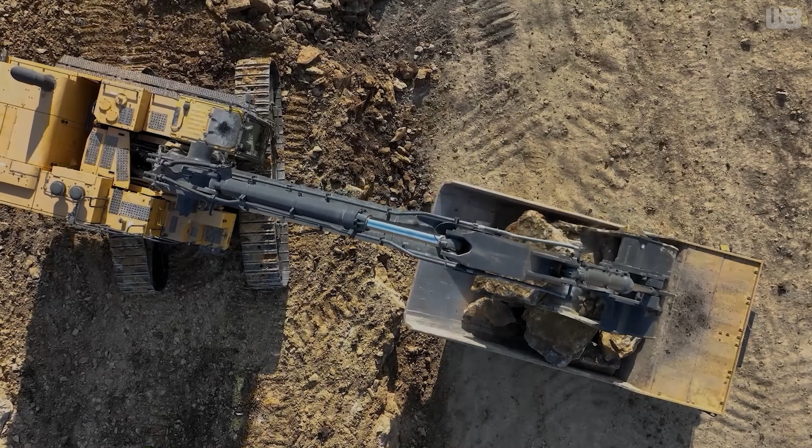I think there's going to be a lot of people out there who may wonder to themselves, why do we even need a form? The challenge, in all honesty, is just the sheer math of the possible configurations out there. From machine makes and models to different classes, stick lengths, coupler options, and the variety of buckets out there, the variations are seemingly endless. So this is why this form is so critical. It's going to ensure that we build an attachment that fits your customer's machine perfectly the first time, every time.

First, we suggest burning an inch. When measuring two surfaces like the inside ear spacing, the tape measure hook can cause some inaccuracies. Start by measuring at 1 inch and then subtract that inch from your final reading. This eliminates hook play and gives you a lot more accurate measurement.

The second thing we suggest is measuring twice. Compare the measurements, and if they don't match, try again. Keep the tape flat and straight. It's super important to avoid any sagging or twisting of the tape. When measuring diameters like pins, we suggest using calipers, especially on those small round surfaces.

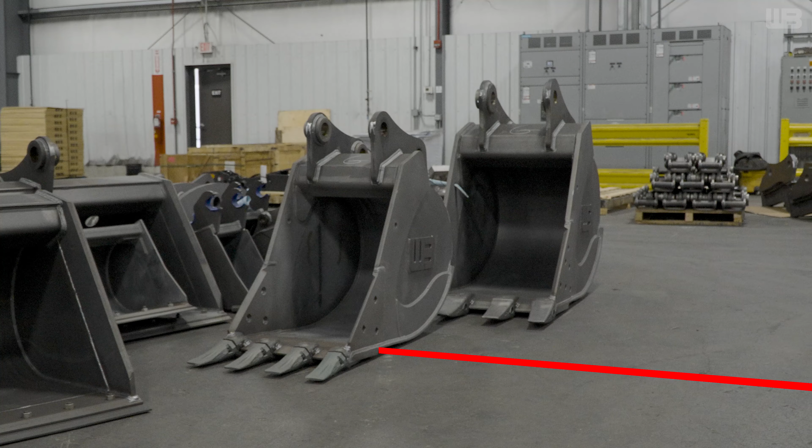First thing we ask for is a photo. We want you to stand back approximately 10 feet from the attachment and take a clear side profile picture of the bucket straight on. This is going to give our engineering team visual confirmation of the coupler configuration and overall setup.

Next, we're going to need you to find our thumb form online. Please fill out your contact information: name, email, phone number, business name, and if you're working on a quote for a thumb, include that quote number as well.

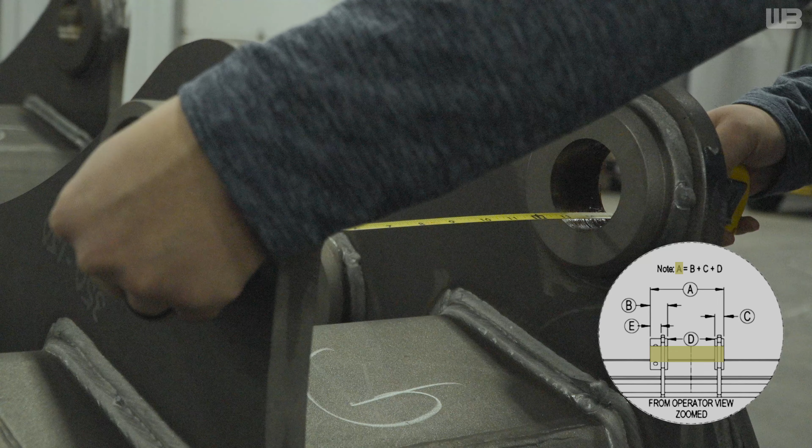Under coupler profile and pivot dimensions, you'll need several key measurements. These measurements, as with all the measurements we're going to be asking for, need to be accurate within 1/8 of an inch. First, we're going to ask you for your A measurement, referencing the form. Measure the widest point of the ears. This is going to be the overall width of the total ear from side to side.

Secondly, this is your B measurement, the pin retainer ear total width. Measure across the ear that has the pin retention system. Thirdly is going to be your C measurement, the non-pin retainer ear total width, or the opposite ear without the pin retention system.

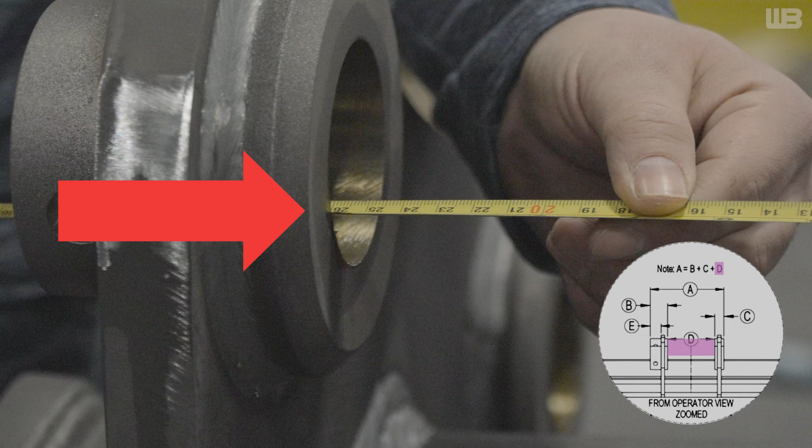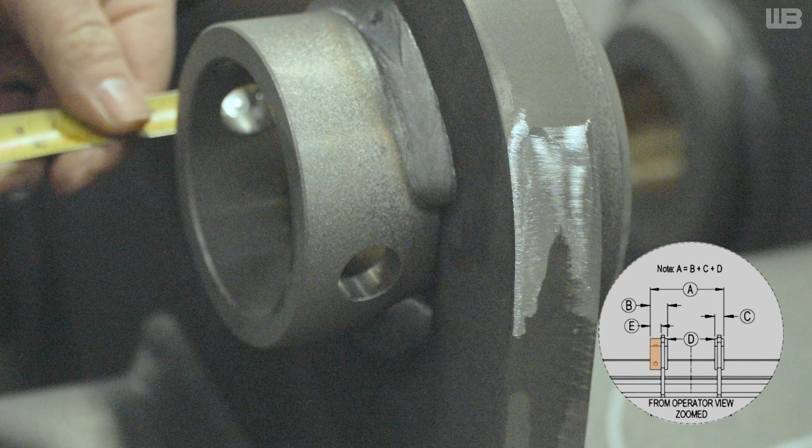Fourth, this is your D measurement. Find the inside ear spacing, the distance between the inside faces of both ears. Fifth, and finally, this is your E measurement, which is the pin retainer width edge to the ear plate, from the outside edge of your pin retainer to the ear plate surface.

Please make sure that you take your A measurement and make sure that, within 1/8 of an inch, B plus C plus D match. Primarily, this is going to be used to determine the length needed for the thumb.

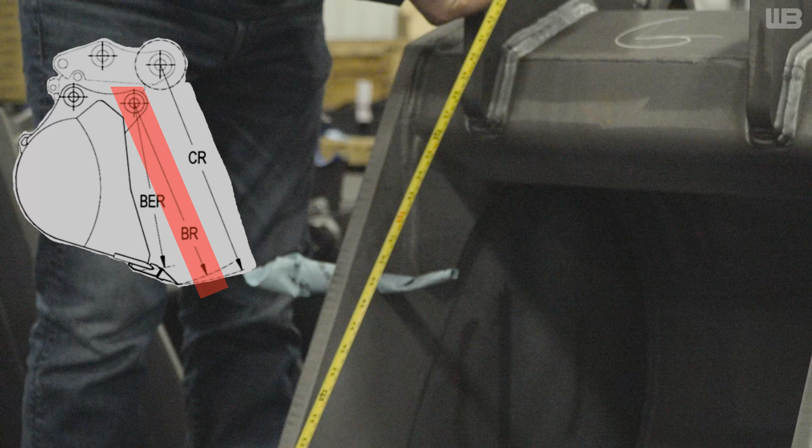For tip radius measurements, we need 3 dimensions. First, the tip radius of the coupler and the bucket combined, which is going to be labeled CR on our thumb form, the arc from the pivot point to the cutting edge. Secondly, the tip radius of just the bucket, noted as BR on our form, measuring essentially just the bucket portion. Third, the tip radius of the bucket to the base edge, listed as BER on our form. This is going to help us determine cutting geometry.

In the bucket tooth information section, you're going to notice we include a diagram that we describe as a narrow tine option versus a wide tine option. This determines how you want the tines on the thumb to fall around the teeth of the bucket. This is something that's going to impact how we lay out your tines for your thumb, and we base it on your personal preferences.

In this section, the first thing we need you to do is select the number of teeth on the bucket. Based on that selection, it's going to give you which measurements we need on your bucket teeth spacing. For all options, we're looking for essentially the same thing: the spacing between each tooth and the width of the teeth themselves. Please make sure that when you add up the dimensions, it equals the total width of the teeth.

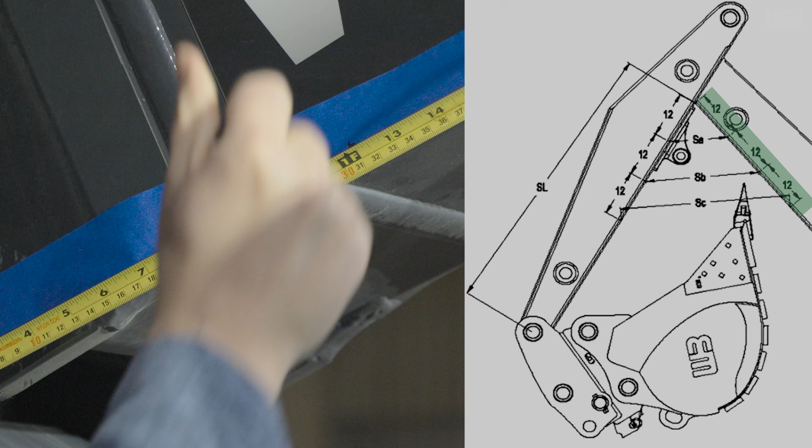Starting with the machine in the fully crowded or transport position, we're going to take 3 specific points, 12, 24, and 36 inches from our reference point, which is the pivot point between the boom and the arm. These incremental measurements help us understand the machine's geometry and ensure proper clearance.

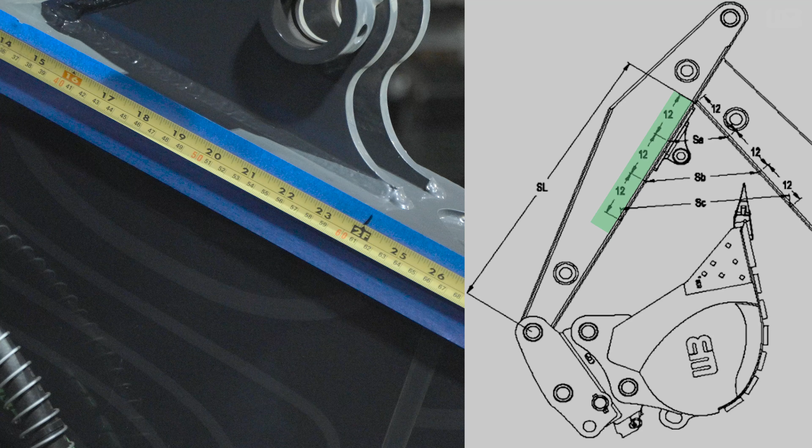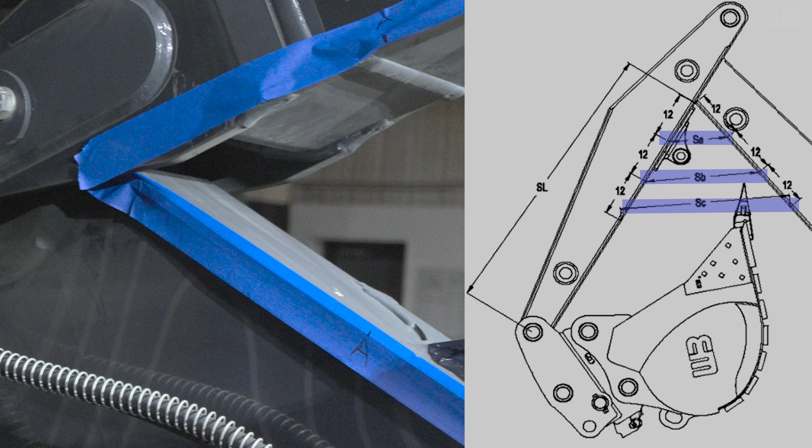Once you have your measurements on your boom, you're going to transfer those same measurements down to the arm or the stick, 12, 24, and 36 inches. From there, we're going to take a point from the boom and a point from the arm, both at 12, 24, and 36 inches. Those measurements are going to represent your SA, SB, and SC, which are referenced on your thumb form.

Finally, we ask for the machine's stick length, which is measured from the pivot pin to the crowded point. Once you've completed all these sections, double check your measurements and submit the form. Our engineering team reviews every submission before manufacturing begins. Remember, accurate measurements mean no delays, no rework, and happy customers.